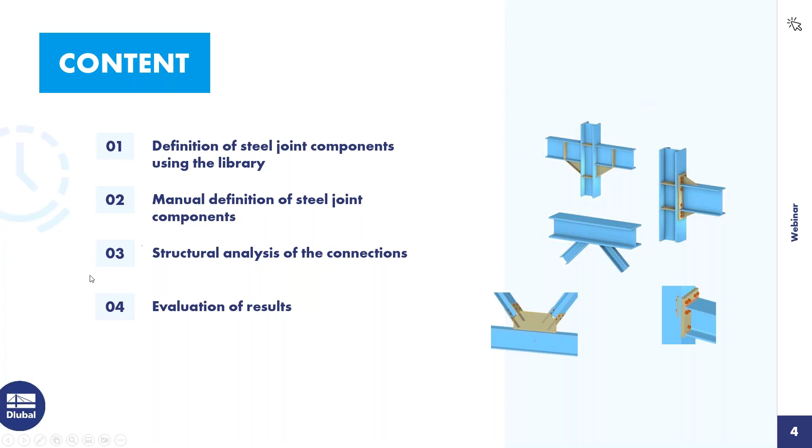Okay, then I turn to the program, RFEM 6. A simple model, a framework, frames in that direction and bracings in that direction, in the X direction. We have got several load cases, for example, the self-weight load case, then the imposed load, two wind load cases, one in X direction and one in Y direction. And we have got several combinations and a design situation.

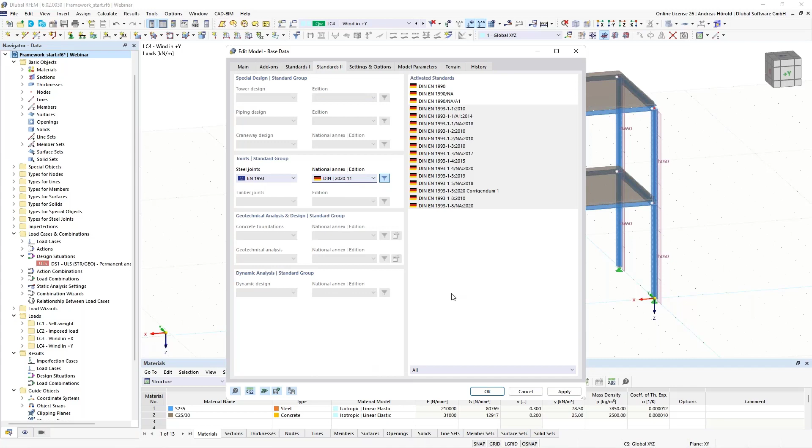So, okay, to design the steel joints, I have to activate the add-on here left above under base data. I open the dialog and then under add-ons, it's already activated. It's from my test. And the standard is also already here for the load case classifications and the standard and national annex, in that case for Germany, for the steel joint design.

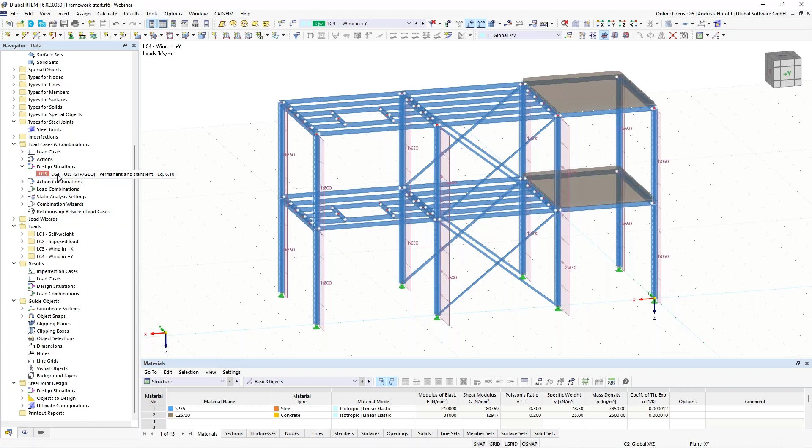Okay. Then if the add-on is activated, there are two new folders here, the types for steel joints, for the creation of the steel joints, and at the bottom, the steel joints design, the design situations, and ultimate configurations. I will show you that component, the ultimate configuration, in the next dialog. But before I do that, I go to the design situations.

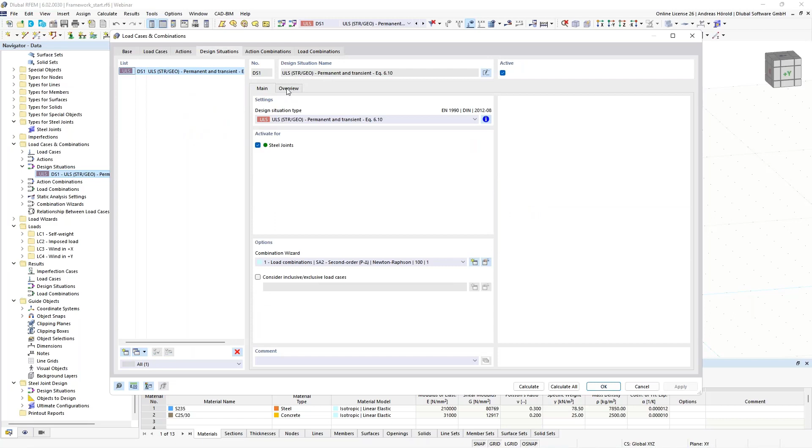You can see again the load cases here, the actions, and the design situation. And it's important, if you activate the add-on, it's the default setting that the steel joints design is activated. Just note that it is here. Okay, and then those are the action combinations and the load combinations. And those load combinations are included in the design situation. You can see that here in the overview. Okay, so we can leave the dialog and start with the first steel joint.

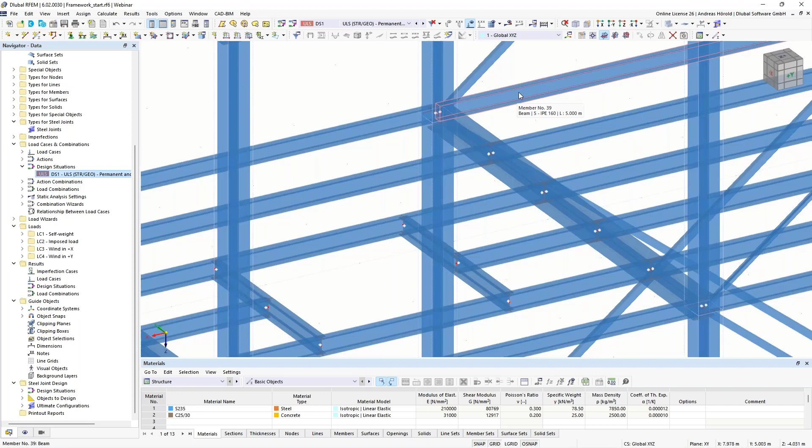Maybe I can show you that in the model. I would like to use that node here, and I will define all connections for that node. The rigid connection of the steel frame and the pin connections of the platform beams and the 2 connections for the bracings. Those are L sections.

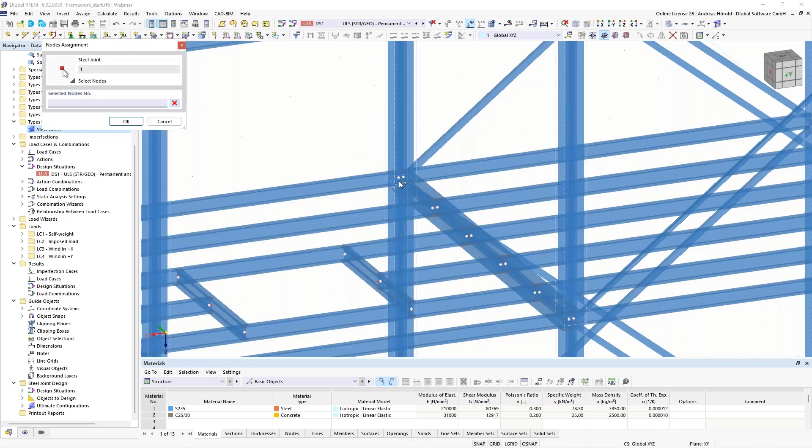Okay, let's start. Right click on steel joints on the left side in the navigator data, and I select new steel joint. First, I select the node. Node 33, and I apply that. There are 7 members that have got the end or the start point in that node here. We can click through them.

Member 1 is the platform beam. That's the bracing, the frame or the horizontal beam of the frame, the upper column, the lower column, the other platform beam, and the upper bracing. Okay, here you can see the design configuration.

I open it. You can perform a buckling analysis. Then you can see the standard settings here, the maximum number of iterations. You can increase that, for example. Then you can also increase the number of load increments. That's the standard setting, limit plastic strain. That's the value from the standard. And so on. I leave all settings as they are, also the safety factors here.

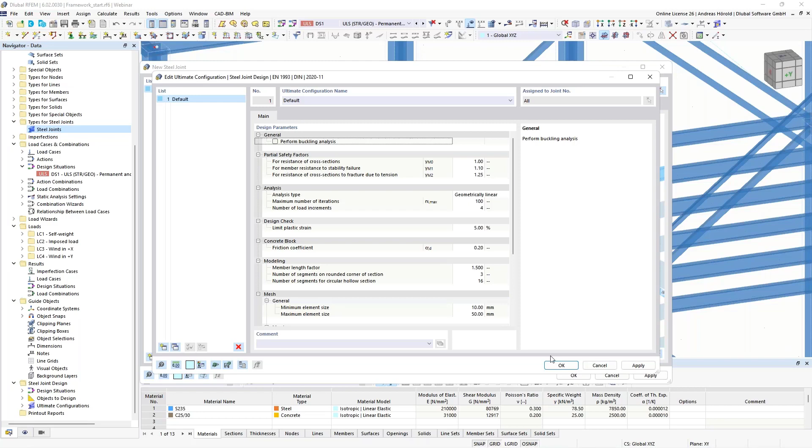Okay, then we go to the next dialog, members. The finite element analysis requires at least one member to be supported. I select the lower column. The column is in reality supported here, and I will support at least this column. Okay, and we define also that the column is continuous. That's automatically overtaken for the two columns.

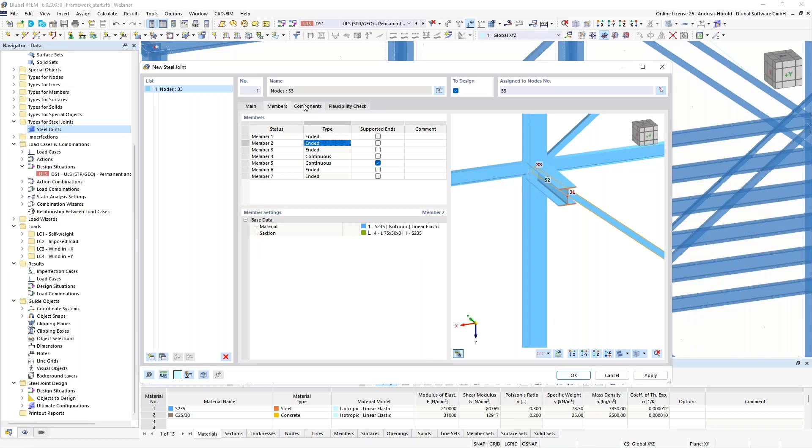So the member settings, you can see here the member settings from RFEM, S235, and the sections, and we overtake the sections, of course. So then under components, you can use the library and you can create single components. I open it. You can see four categories.

The modifications, member cut, plate cut, we will use both of them. Then the plate editor, plate, stiffener, haunch, and so on. Then under connection elements, end plate, fin plate, under others, the auxiliary plane, a help plane, then the welds and the fasteners. Yeah, that's the current state of that library.

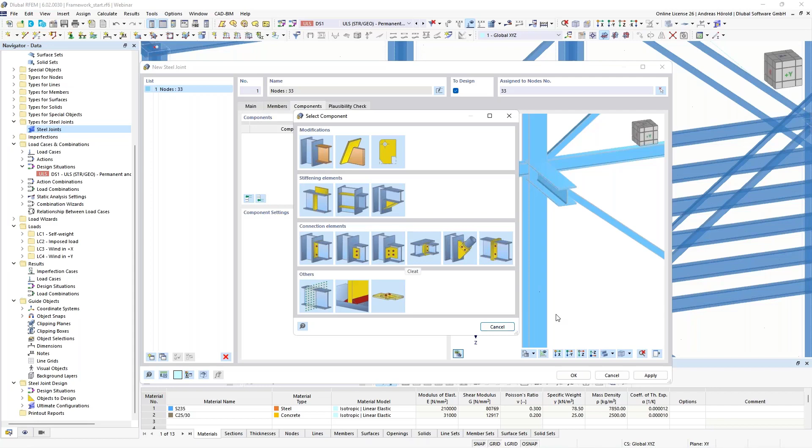We will extend that library continuously. A team of eight members or eight employees are working on the development of the add-on Steel Joints. We also extend the templates. I go to the template library. So there are also four general categories: the rigid connections, the pinned connections, truss, and the bracings.

I click through some examples: beam to beam, beam to column, with haunch, such a connection. If you download the trial version or you already bought the program, you can click through the single components. Maybe cross joint. Okay, I will show you some pinned connections: beam to beam with cleats, fin plate, short end plate, beam to column, the same, cleats, fin plate, short end plate, and so on.

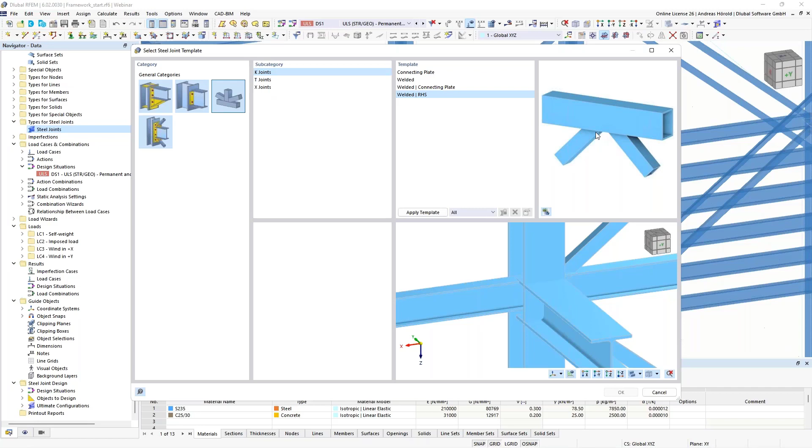Trusses, you can use that for diagonals or for bracings. The K joint, welded, such a connection. Also for bracings to use welded, it's quite new. The rectangular cross sections with a weld, T-joints, X-joints, and so on. Then last but not least, the bracings. Similar connection, such a connection. Okay.

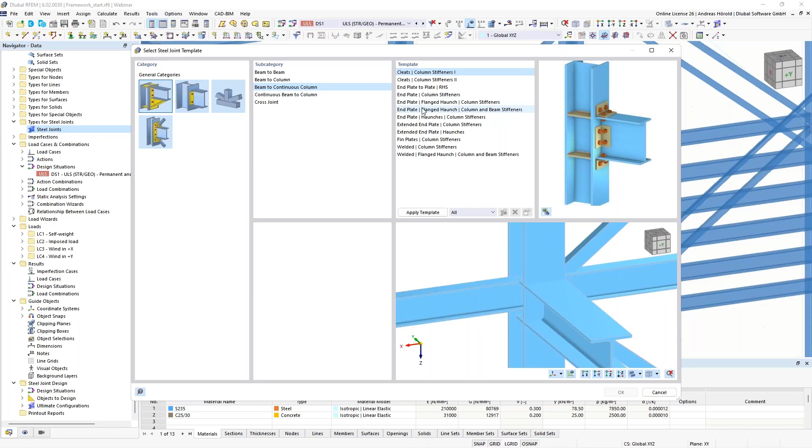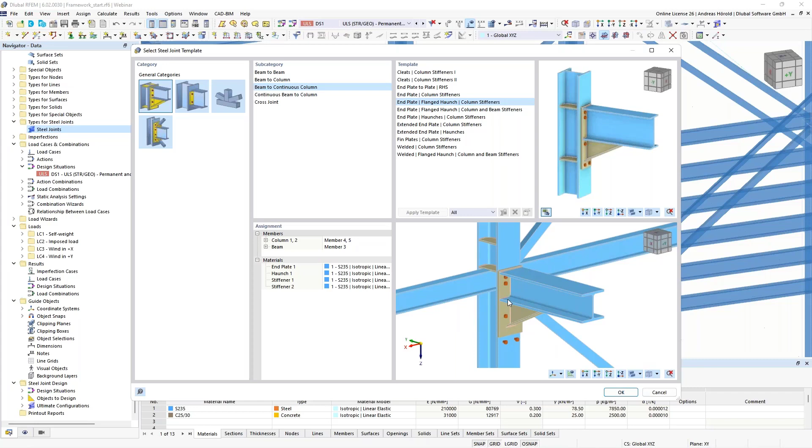But we will start with the first connection, the rigid connection. I use here the category rigid, beam to continuous column, and this one with a haunch and column stiffeners. If I apply the template, we will see it in the preview here right at the bottom. And you can see we have to modify that connection. We leave the dialog with OK. And we go through the single components. So I extend the window a little bit.

Okay, so then we start with the end plate. Member 3 is okay. You can see member 3 is selected if it is chosen. Then the reference member is the column. You can see it's selected. We use a thickness of 15 millimeters. Then 210 millimeters. Left offset, we don't need an offset. We say 0. Okay. On the other side also 0. The rest is quite okay.

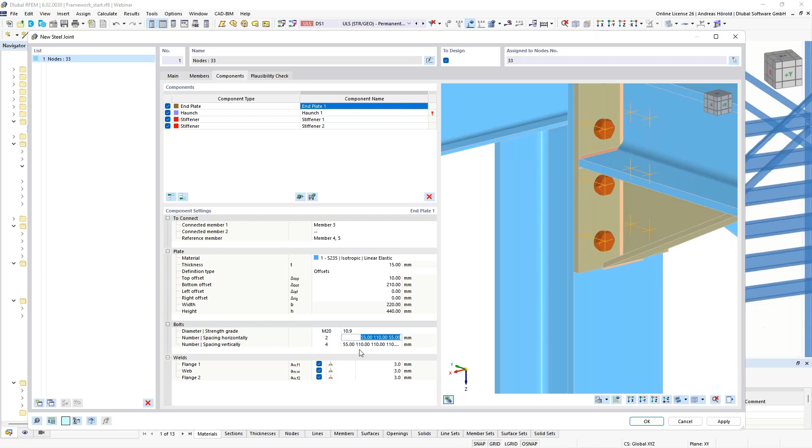So then the bolts, we use a diameter 20 millimeters and a screw strength of 10.9. So then you can use our values here. It's quite okay for this connection. I will only change the vertical spacings. I use only three bolts. Okay, and I only entered the first three values. 70 space 90 space 150, and the last dimension is calculated automatically.

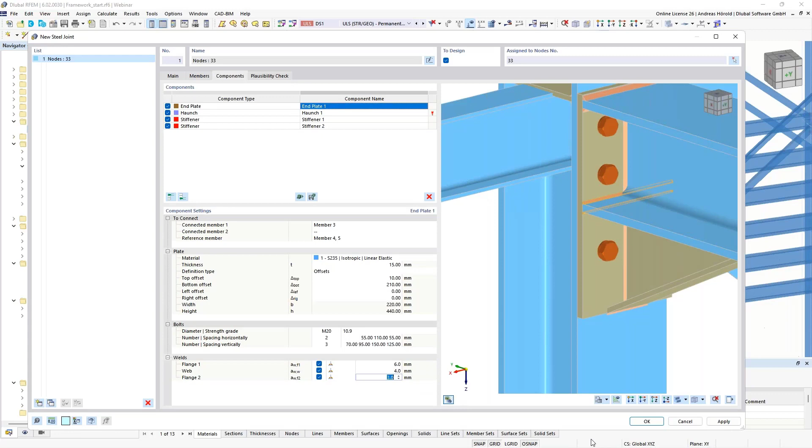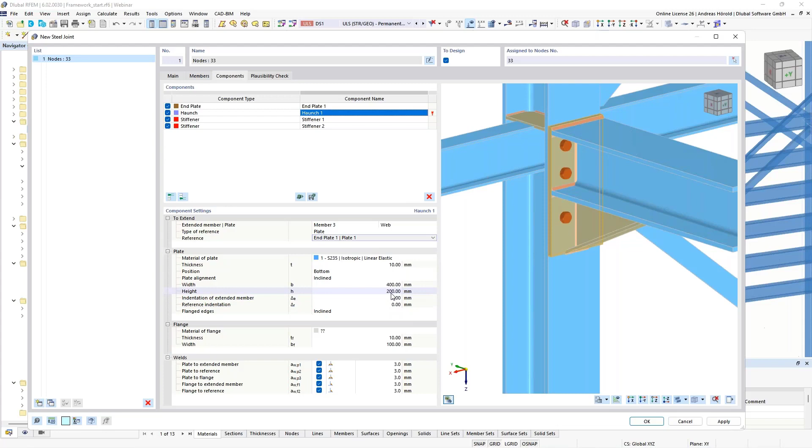Okay, then double fillet welds for the flange, 6 millimeters, then 4 millimeters, and also 6 millimeters. Okay. Now, you can see we have to modify the haunch. That's the next step. So member number 3, that's okay. So then plate is also okay. And plate 1, that's okay. So the other values are also quite okay. I decrease that value. Okay, and you can see now it's okay.

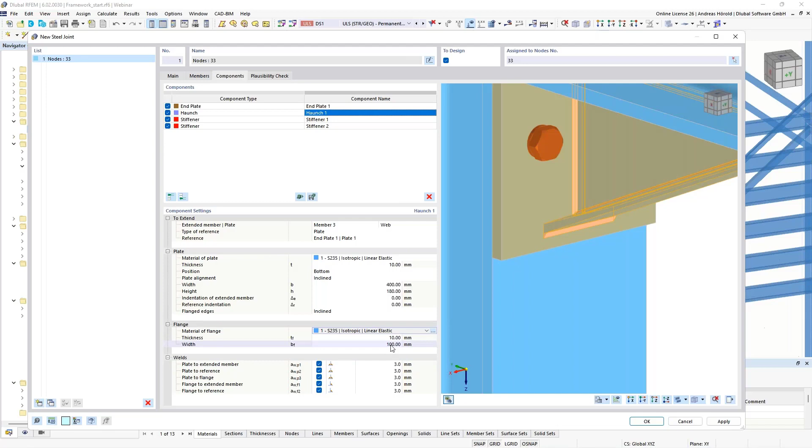So then I have to define a material for the flange. We use also the S235 steel. So then the width can be larger, 200 millimeters in that case. Okay. So then the welds, that weld here, you can see it's selected, 4 millimeters. Now we can leave the double fillet weld. Then this weld also, the double fillet weld, 4 millimeters. Then plate to flange. This one, also 4 millimeters. So then the flange extended member.

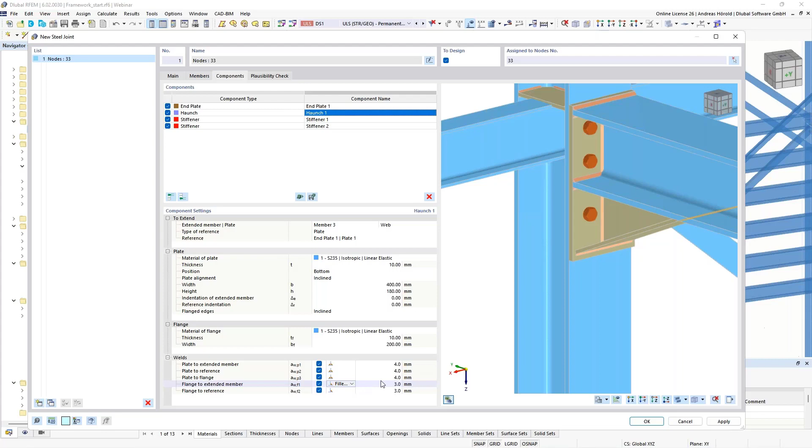Now this is this one. We use another weld, a butt weld rear side. And for this flange to the reference, it's this weld, we use a double fillet weld, 5 millimeters.

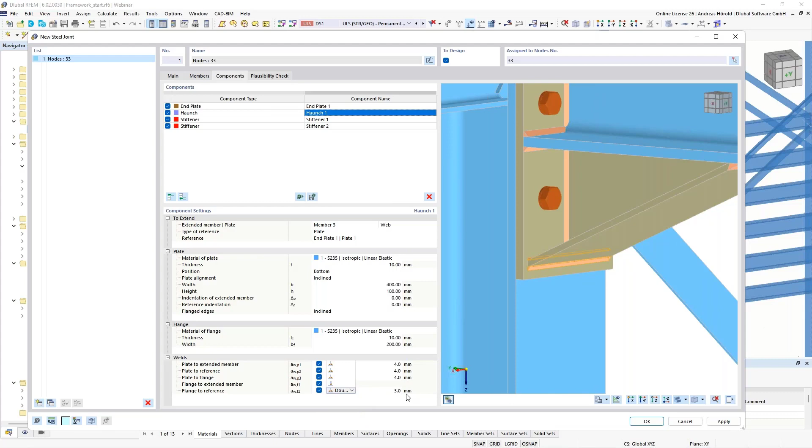So the haunch is quite okay, but the stiffener not. So that stiffener should be quite okay. Let me check the values. Yeah, okay, I only define a weld of 4 millimeters. But we have to move the upper stiffener here.

So the value is minus 400. Okay, and I've also to change the weld. Okay, the rigid connection is finished.

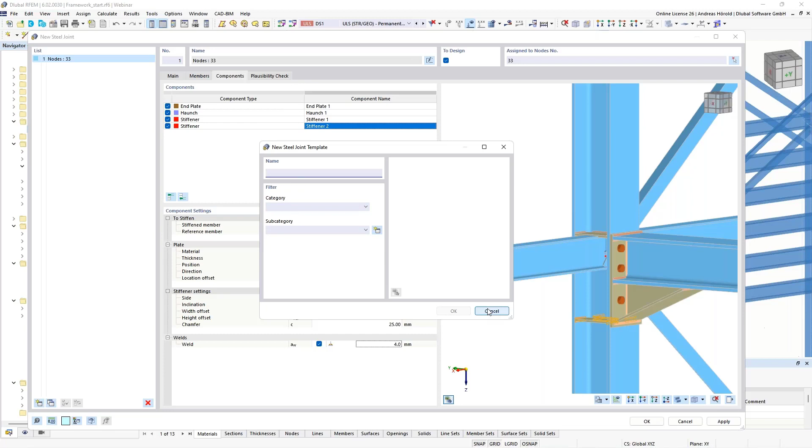And yeah, it would be possible to save it as a template, for example, to use it for the other rigid connections for the frame, for example, on the edges of the framework. And then you could press that button here, save component as template. You can give it a name, select the category and subcategory, and so on. Okay, I don't do that.

I continue with the connection of the platform beam, of that beams here. So that's why I use a component at the end, an end plate, this one, end plate.

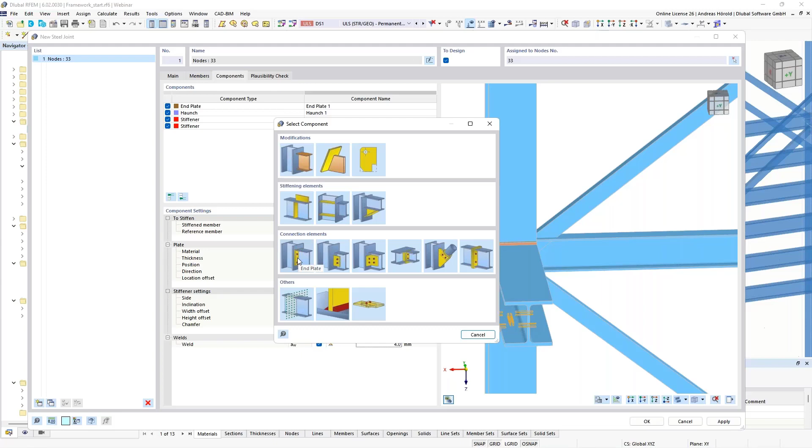So connected member is member 1, this one. And the reference or the other connected member is the member on the opposite side. It's member 6. And the reference member is the column, that's the members 4 and 5.

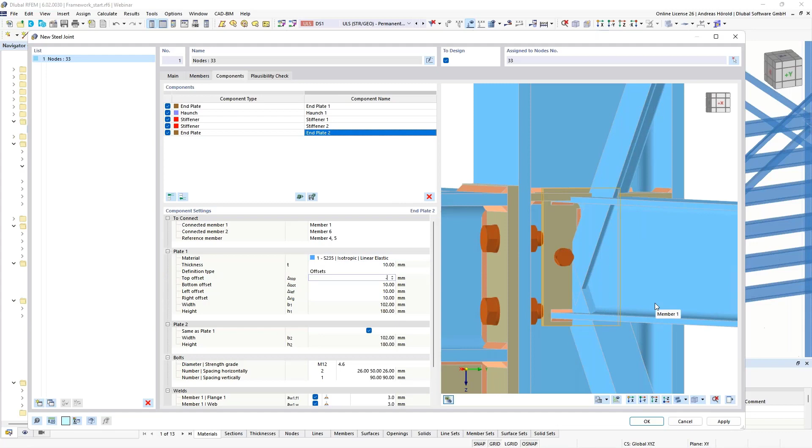Okay, now you can see the end plate. Same material. I decrease that value here. Now we don't want to connect the flanges. Also on the lower side, minus 20.

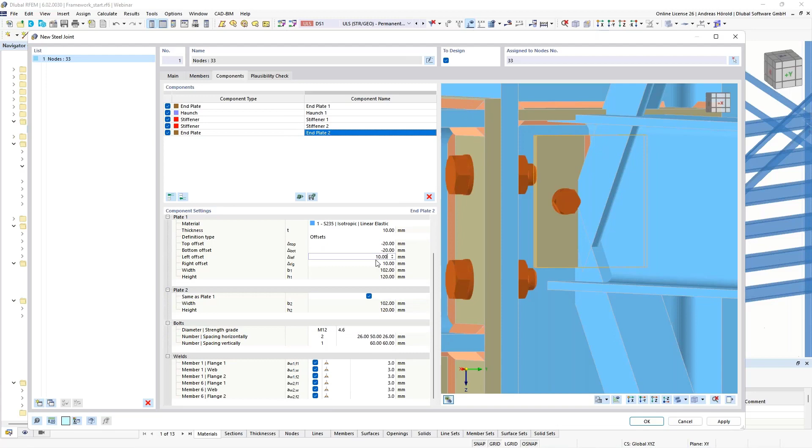Okay, the rest is quite okay. The opposite plate should be the same. It's on this side. Yeah, you can see it here.

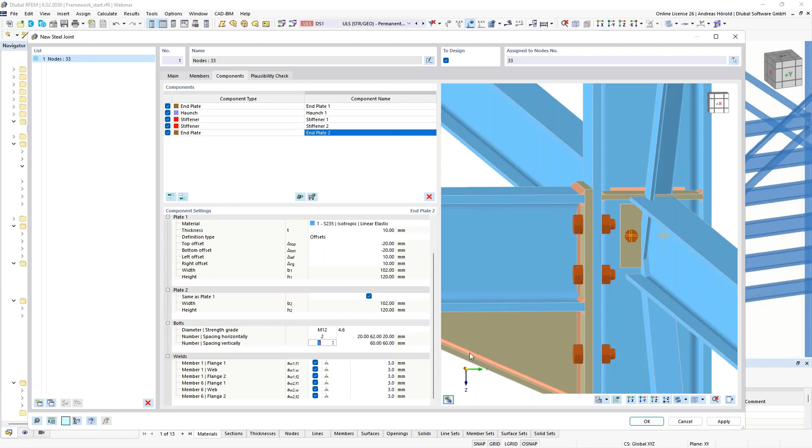So then bolts M12, it's okay. 4.6 as screw strength is also okay. Then I enter the value 20 and the rest is calculated automatically.

So then I use also 2 vertically and enter the value 35.

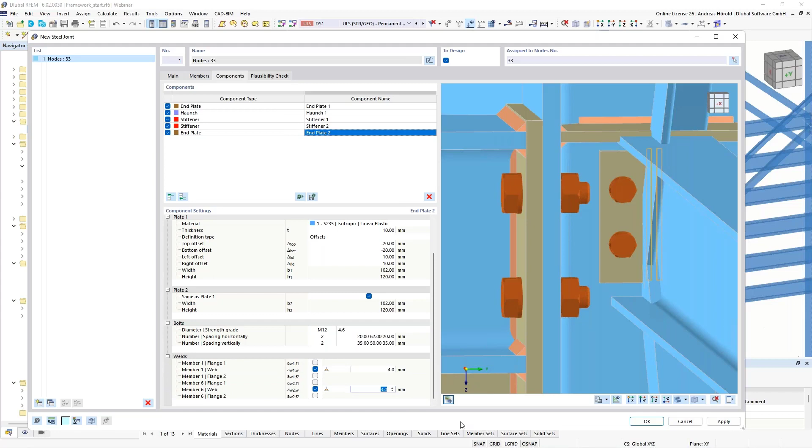That's good. So then we turn to the welds. We don't connect the flanges. Yeah, that's why we deselect our flanges. Only the 2 webs should get a double fillet weld. And the value is 4 millimeters.

So now the 2 end plates are finished. Not yet, sorry. We have to add a cut here. Yeah, it's in conflict with that plate here, with the plate of the rigid connection.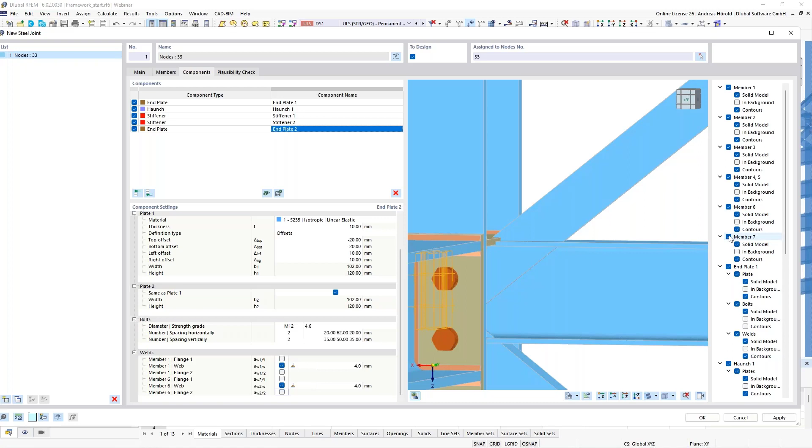To have a better overview, I use that button here, right at the bottom. I deselect the member number 7. Now it's better to see, I think.

So I add a member cut. Which member? Member 1, by plate.

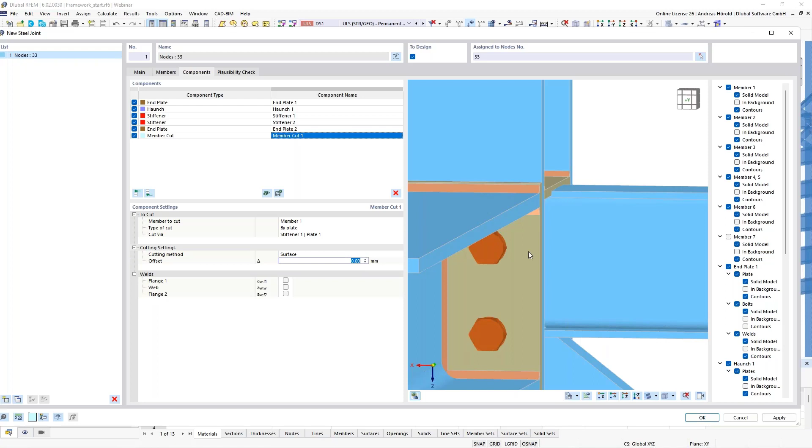And cut via stiffener 1, plate 1, that one here. Surface with an offset of 15 millimeters. And now you can see the cut.

Okay, to have it on the opposite side, I can copy that. That's also a new feature. By right-click, I copy the components at the end, only this one component.

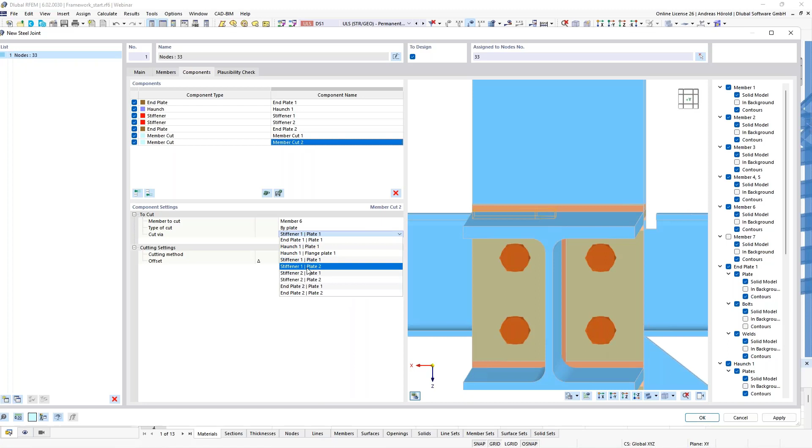And I have to define another member. In that case, member number 6, the left side. And the cut is via stiffener 1, plate 2. So you can see it.

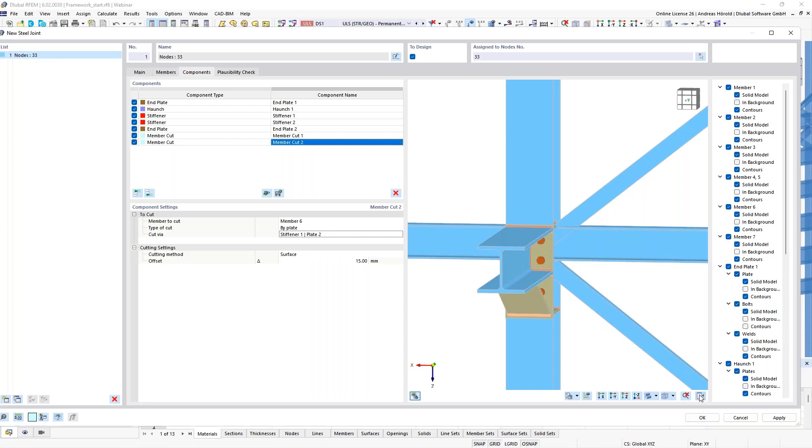So now the rigid connection is created and also the pinned connections, and we continue with the bracings. I select number 7. Okay, I can close it to have a better overview.

Yeah, since we haven't got this component that I want to use in the library, I have to create it with the single components. Yeah, it's a little bit more complicated, but you can see now that it's very flexible. Yeah, you can define almost all connections with the single components.

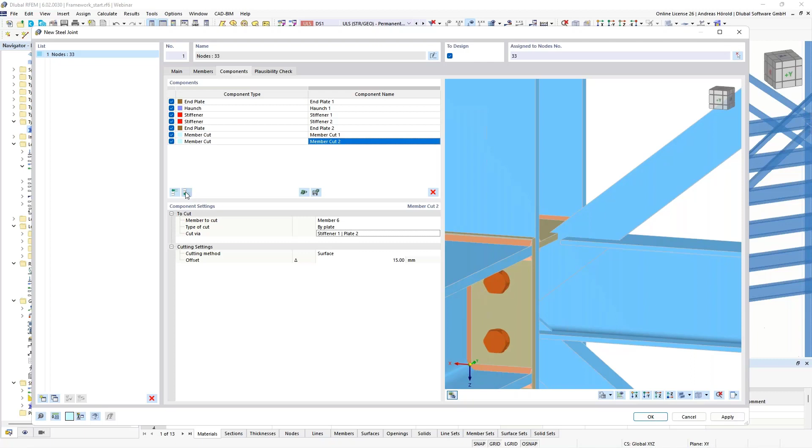So I start with a plate, stiffening elements, plate. So the material is S235 again. The thickness should be 8, then 250 and 170.

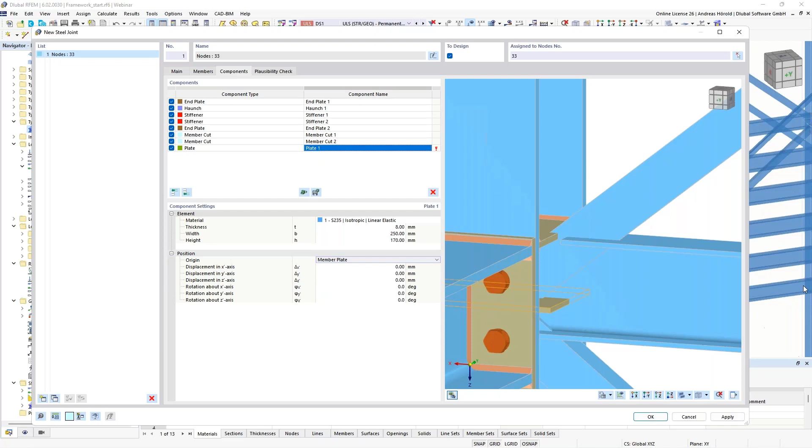And the position should be a member plate. So, and that's the member number 7 and the leg 1. Now you can see it in the preview on the right side.

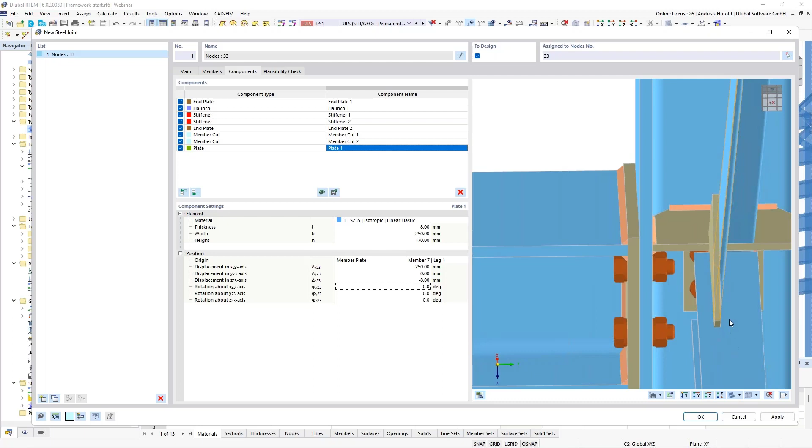Okay, but I have to move it a little bit. I use 250. Okay, and to have it on the side of the leg, I enter here minus 8. Yeah, that's the offset of 8 millimeters. Yeah, and you can see now it's not in the axis of the platform beam.

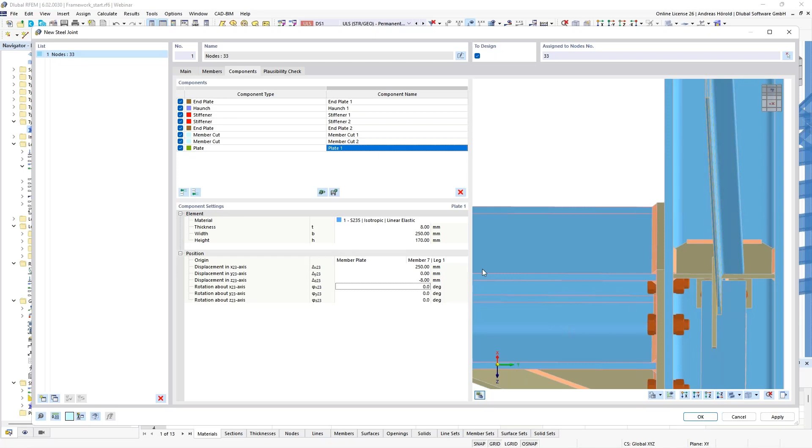Yeah, that's the difference between the static model and the connection model. Yeah, the axis of the L section is here, and the axis of the horizontal beam here, and the plate now has an offset. Yeah, you can avoid that if you define an eccentricity for the bracing in the RFEM model, or you can ignore it for the steel joint design.

I ignore it for the steel joint design. It's up to you how to use it. That's the difference between the axis model in RFEM and the detailed connection model.

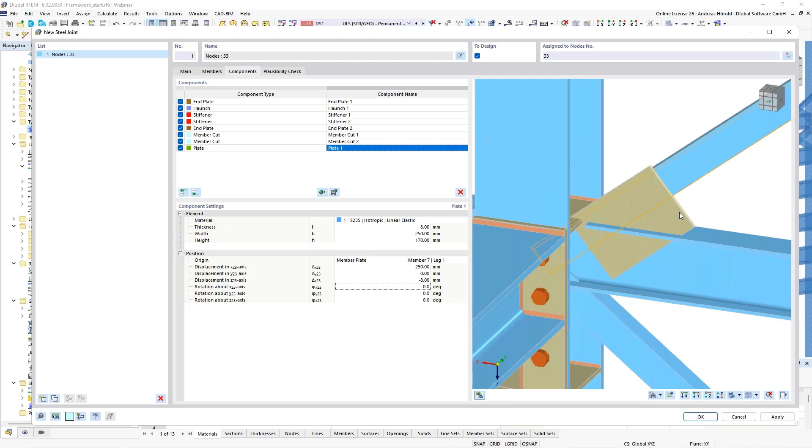Okay, the plate is not finished. We have to enter cuts. I enter this plate cut. The plate is number 1. By member plate.

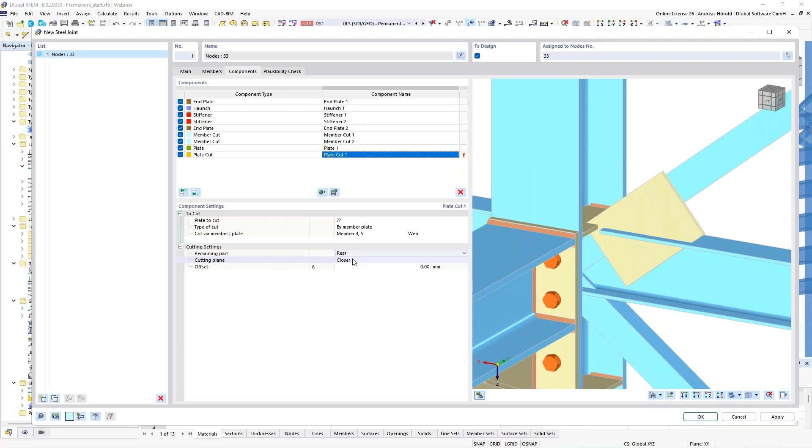Cut via, I select the column, and the web of the column should be the reference point. Okay, the rear side, closer end is the cutting plane. So we can do it step by step.

No, that doesn't take the plate number 1. Okay.

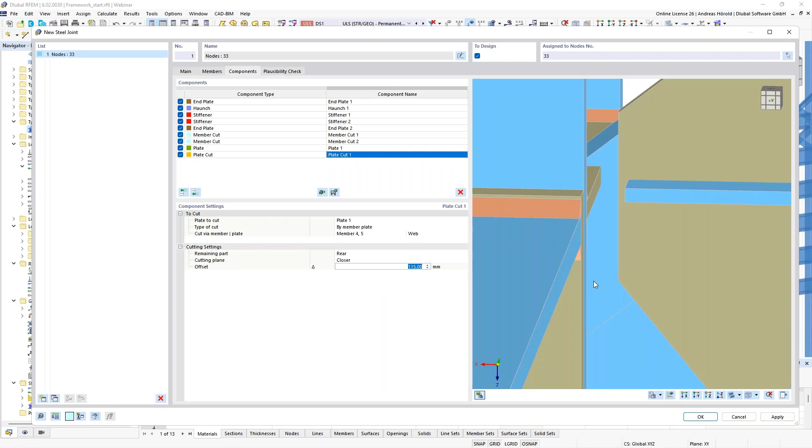You can do it step by step, or calculate which is the right place. I would like to have the plate cut here at the end of the member cut, and that's 120.25.

Okay, this cut is quite okay. We enter a new cut. So again, plate number 1.

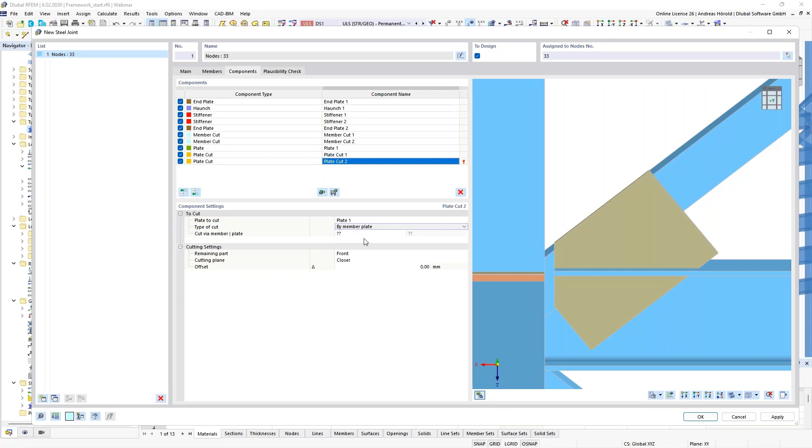By member plate, that's the same again. Member 4 and 5, and the web. That's the reference point. Front, the closer end, and I enter minus 335.25. Okay, only one cut is missing.

Plate cut. Again, plate 1. So now by member plate. And this time member number 1.

You can see it's selected. And the upper flange, flange 1. Okay, the rear side. Yeah, and that's all. I only have to enter a double fillet weld of 4 millimeters.

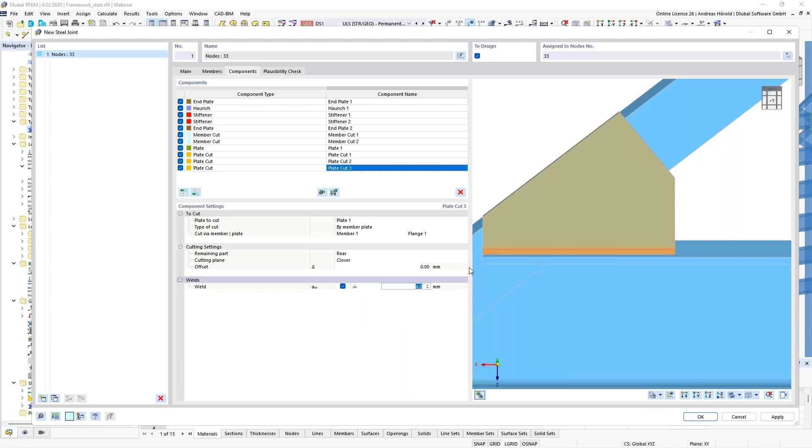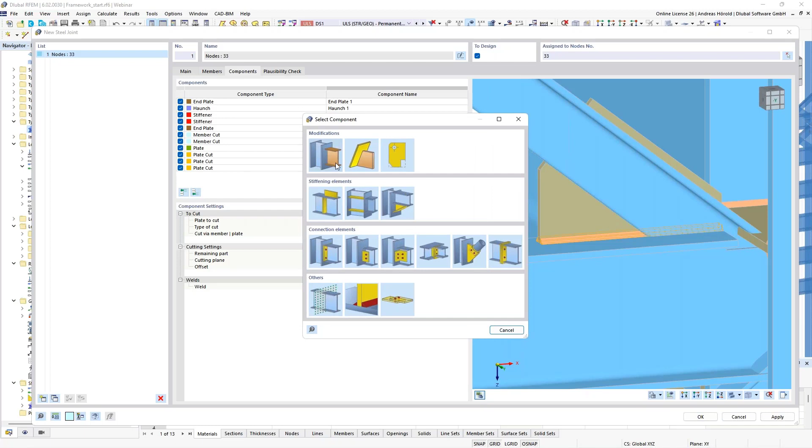So now we have to cut the member. You can see it's in conflict with the other parts of the connection. So I enter the next component. Here left above, a member cut.

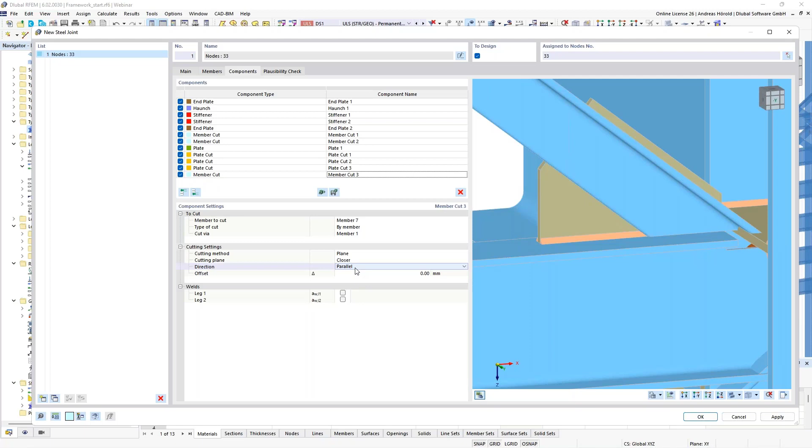The bracing is the member number 7. By member number 1, that's the platform beam, yeah, the horizontal beam. Then it shouldn't be parallel, but perpendicular. And a small offset. Okay.

So now we have to define the bolts, meaning fasteners. I add the component fastener. The component is member plate,

member 7, leg 1. The other component is the plate number 1. So that's okay.

M12, I use another screw strength. You can decide by yourself. I, for example, use 8.8 this time.

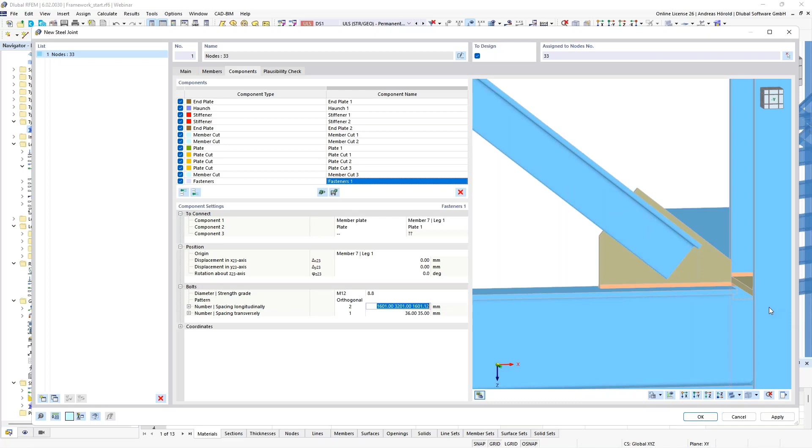And that's the distance from the crossing here: 300, then space, and the distance between the screws or bolts should be 40. And that's all.

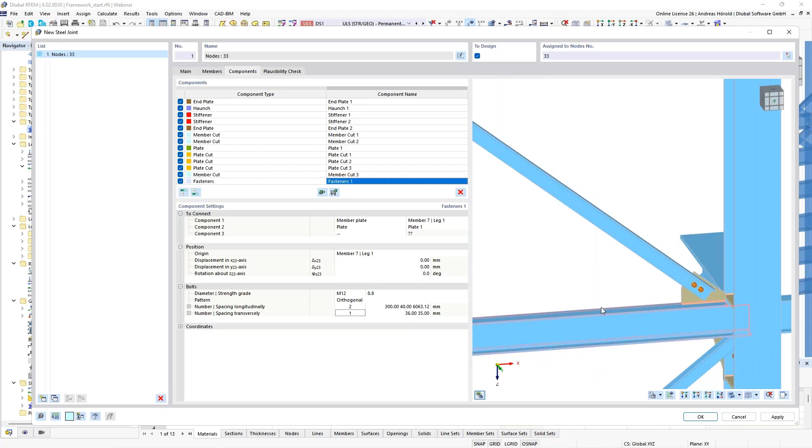And now the connection for the upper bracing is finished. For the lower bracing, we use the same function. I copy that. So I copy the last 6 components.

I select all. Then I do right click and copy components at end. So now it's the same connection, and I have to modify it.

So that's plate number 2. I start with plate number 2. So I only define here another value, member plate, but this time another member: the member number 2, the lower bracing, and leg 1.

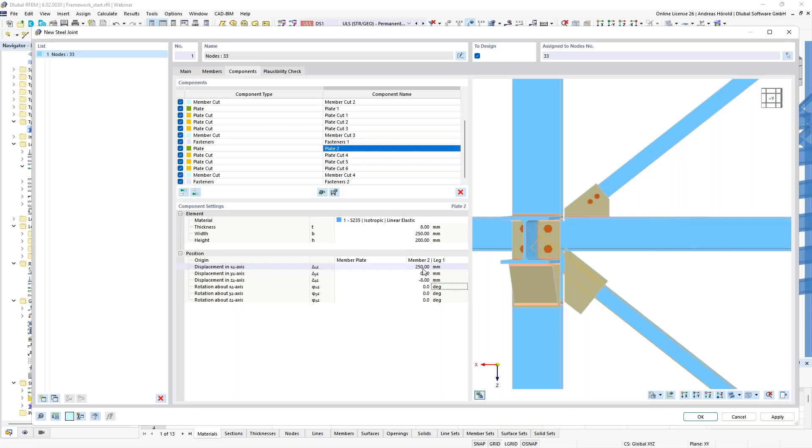I hope you can see that it is selected. Okay, then those values are almost okay. 90. Okay.

So then plate cut 4. I use another value. Yeah, you can see the 45 millimeters are okay for this connection here. Plate cut 5. That's also okay.

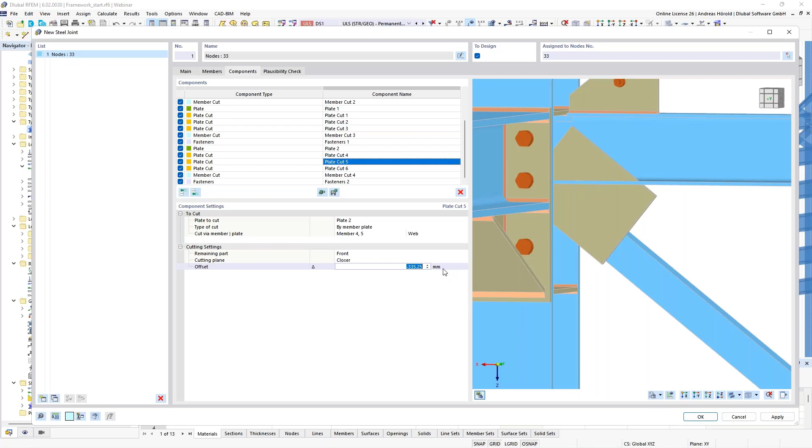Minus 265. And only this plate cut here, the flange is missing. Flange number 2, the lower flange. Then the front side. Well, and that's all.

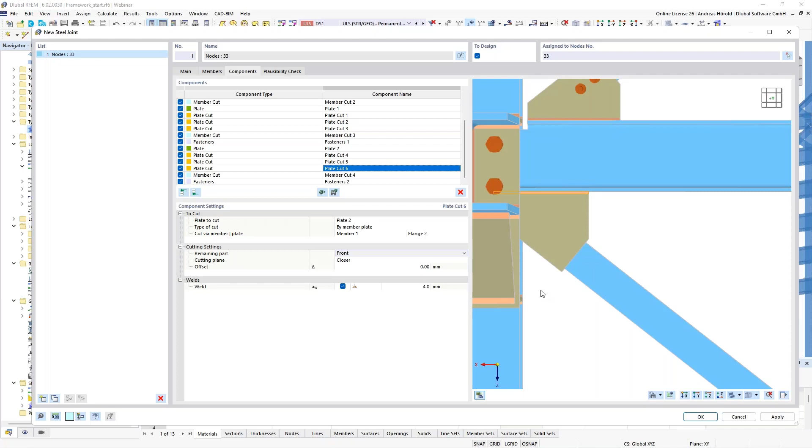So then the member cut, I rotate it a little bit, but you can see all. This time member 2. Yeah, and that's all.

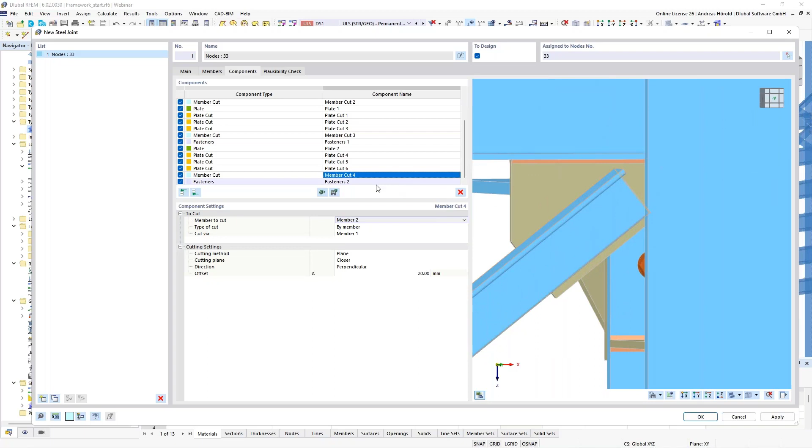Only the fasteners need to be modified. Member 2, leg 1. So, and 200 space 40, and that's okay.

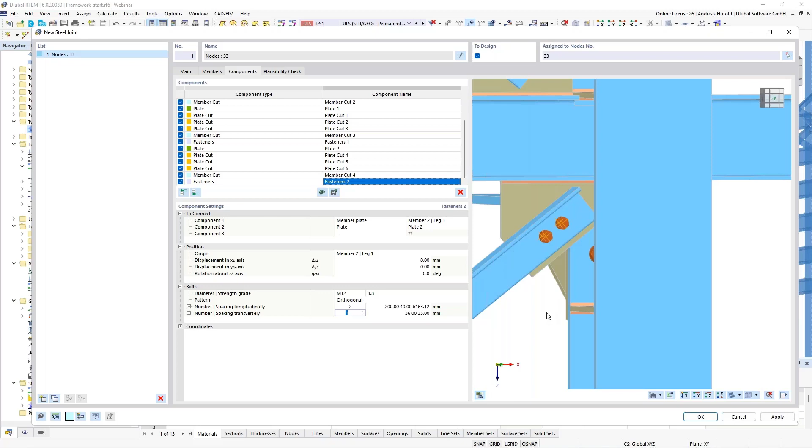So you can take a look if everything is okay, and you can do a plausibility check. Yeah, no errors found. Now that's quite good. Okay, I leave the dialog,

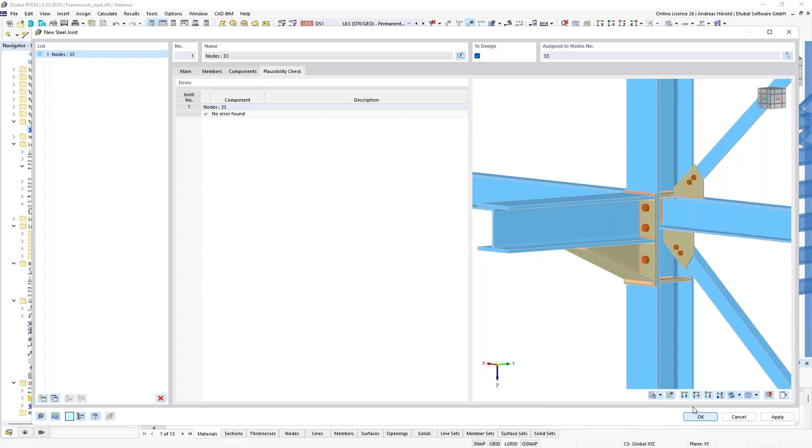and you can see the connection in the preview. If this button here right above is activated, you can also activate no joint model or simplified joint model. Now I will use that.

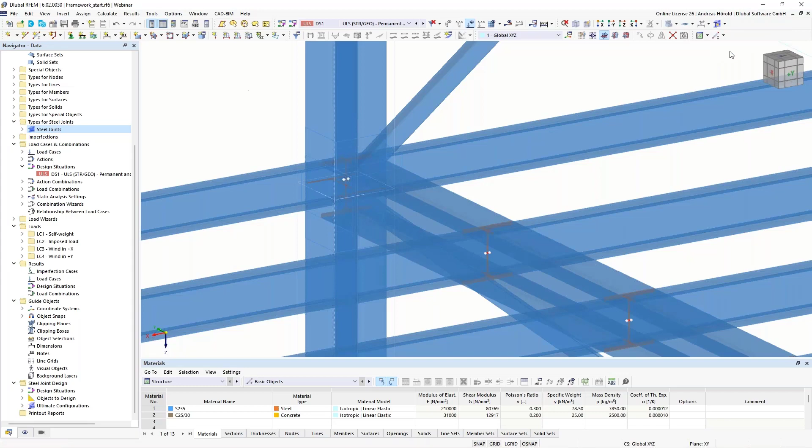So, and now I can also use that connection for the other 3 nodes here. So I can, for example, open the dialog by double click on the connection, and I can select the other 3 nodes.

Okay, so I apply it. And now we have got 4 connections, 4 similar connections.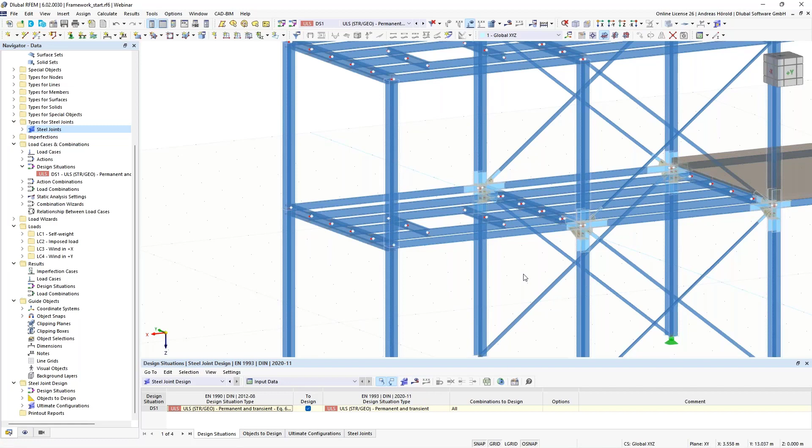So then we can open in the table here the steel joint design. And if I press that button here, the calculations would start. I skip the calculation. Yeah, the calculation time is about 15 minutes on my computer. I skip the calculation time and I open the calculated model.

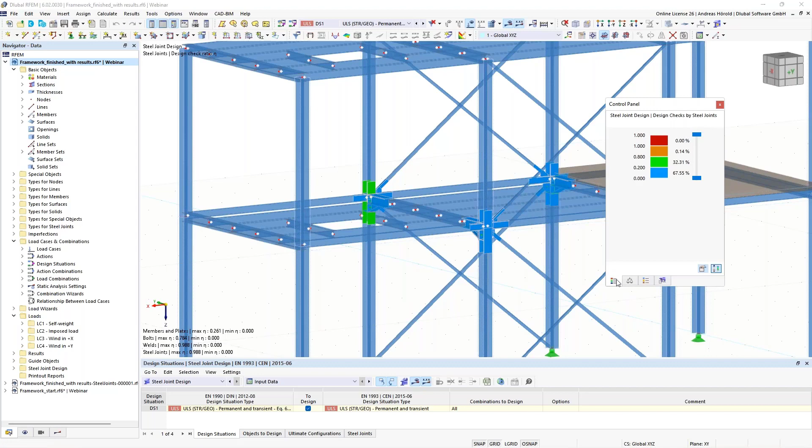I open the panel, and you can see the ratios here graphically. That's the connection with the highest ratios. I go through the table, steel joints, stress strain analysis. You can see the design ratio by design situations, by loading, by joint, by node, by components.

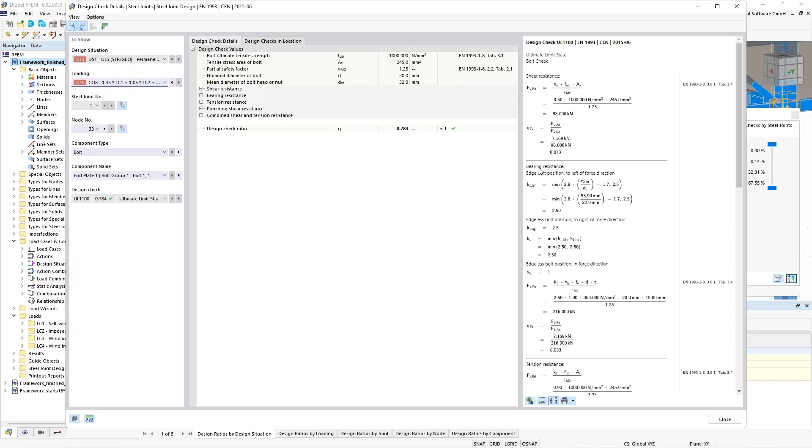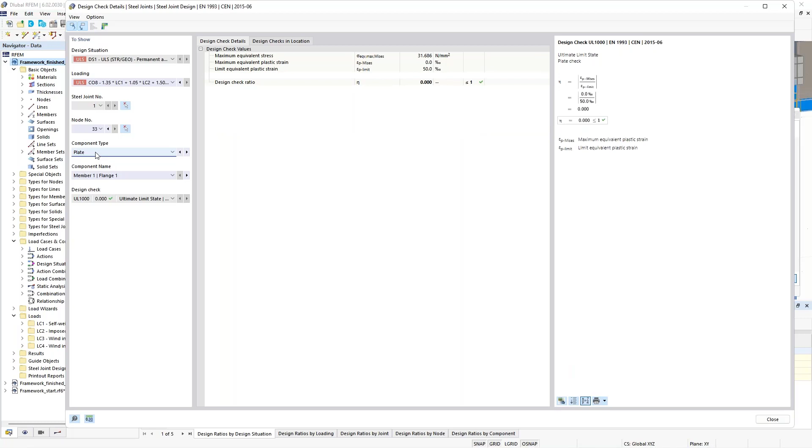If you open the design check details, you can see all formulas from the standard for the bolts, and where to find the formulas in the standards. You can also switch between designs here, plate, weld, the welded design, and so on.

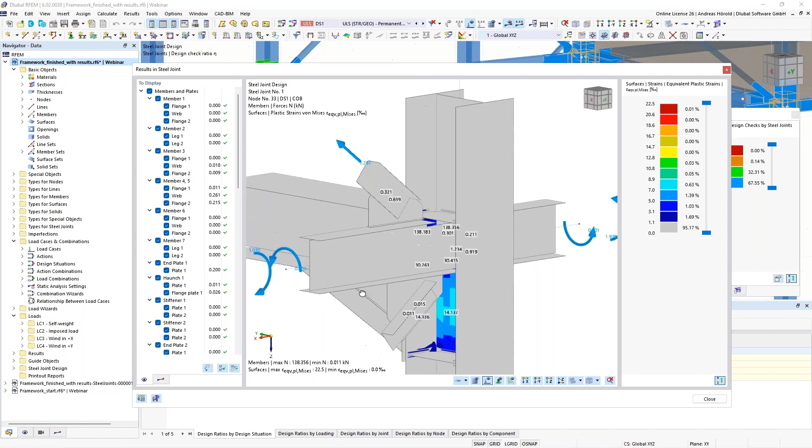When you click that button, results in steel joints, you can see the detailed model. So it's the whole connection. You can see the ratios here graphically.

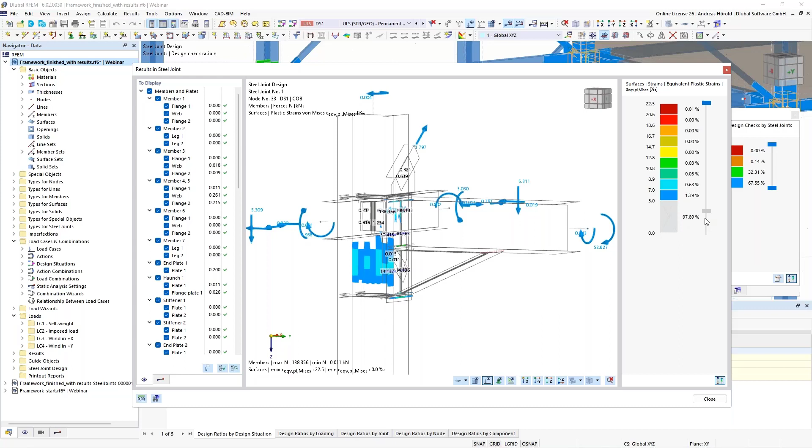The gray area is a new feature for values that are not of interest, for example very small values. You can click through the single components, deselect for example the members and plates. Now we see, for example, here the welds and the maximum design ratios. And you can go through all.

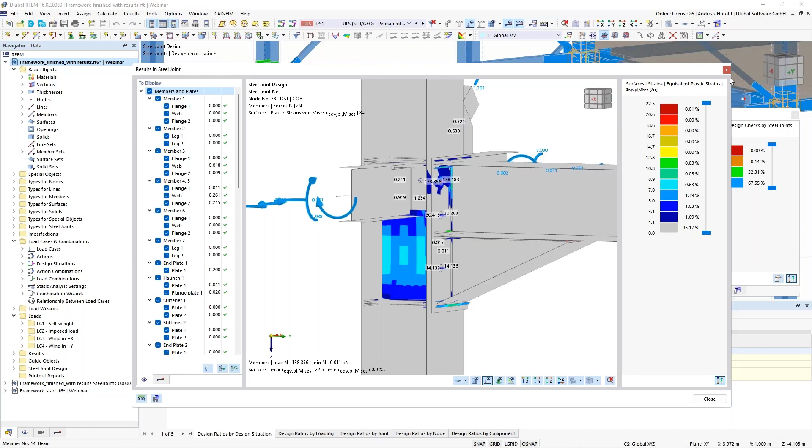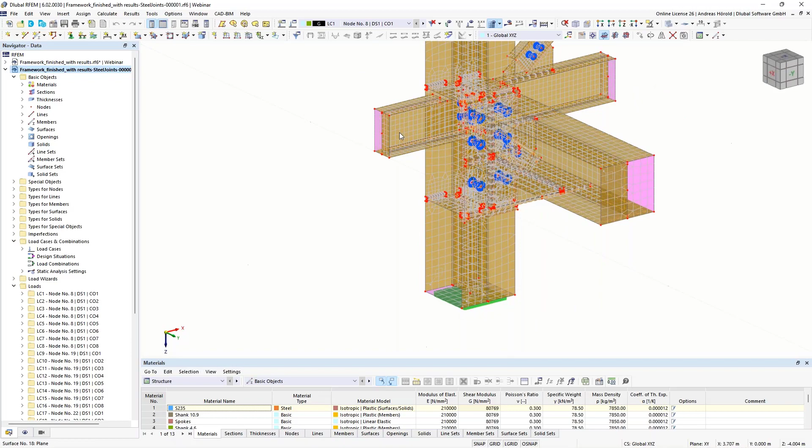You can save that submodel with the button at the bottom left and open it. That's the submodel with surfaces, the supporting of the column, horizontal beams as surfaces, the bolts, the welds. You can see a simplified model with surfaces and rigid links here.

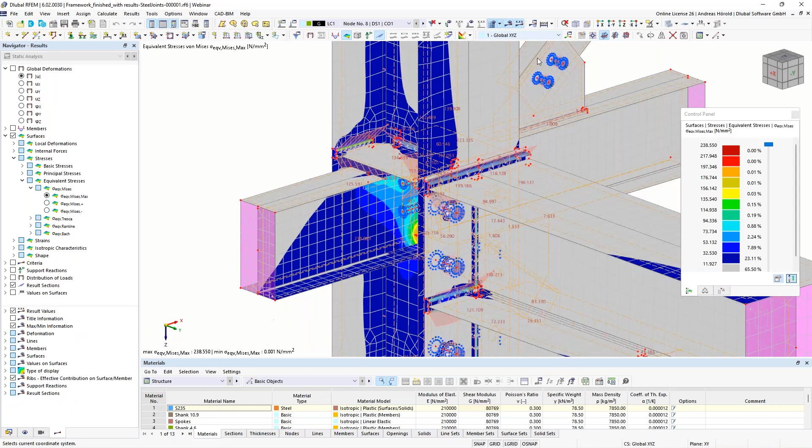We can also take a look at the results on the surfaces, for example here surfaces equivalent stresses, the sigma max Mises. You can add dimensions here and print it in the printout report.

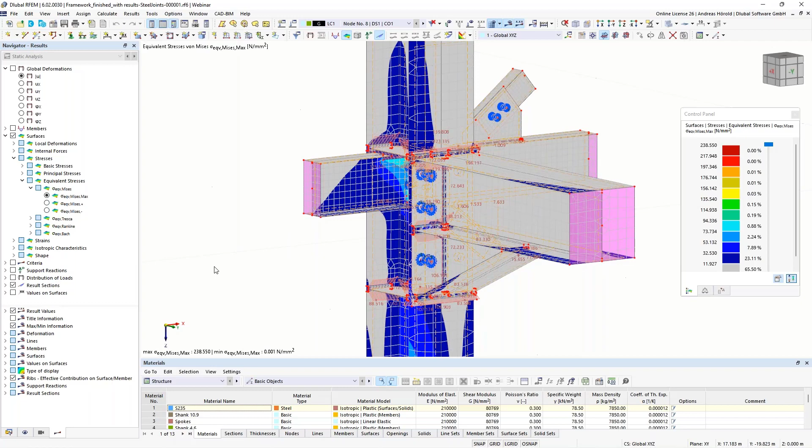Did I forget anything? Well, I think no. That should be all for this connection. I switch to another RFEM window with other connections that we already prepared.

You can use the plates behind the flanges here for such a rigid connection.

Quite new is the welded connection of rectangular hollow sections. You can see where the weld on the fillet is missing, we are working on it. At the moment you are on the safe side, only the straight components are connected. We are also working on the implementation of the round hollow section, and when we release it, I think also the welds on the fillets here are ready.

Also such a connection. Then other connections are, for example, the diagonals for a truss. Here's another connection. It's not practical to use different connections on one truss, but we would like to show the different options in that model here.